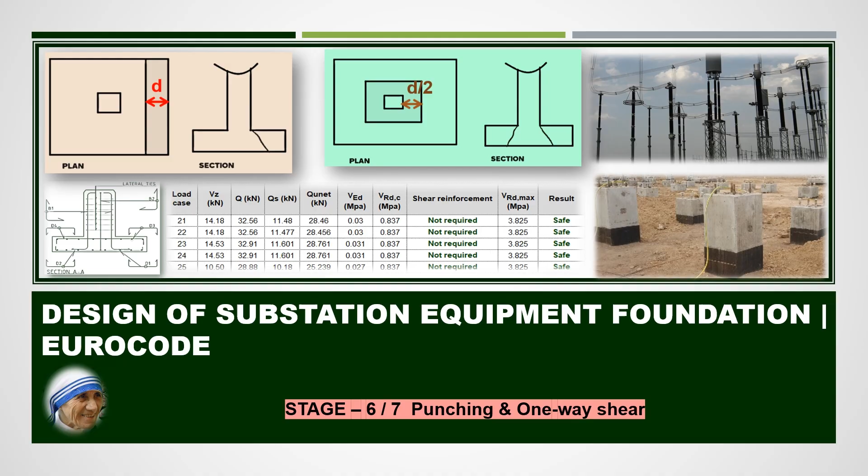These are the various design stages we have seen already. Number 1, in the first stage we have checked the overview of calculation. Second is foundation and soil parameter loads and load combinations. Followed by that, stability check, foundation bolt design of bottom slab, and now we are in punching and one-way shear.

After this we are going to close this series with design of pedestal in upcoming videos.

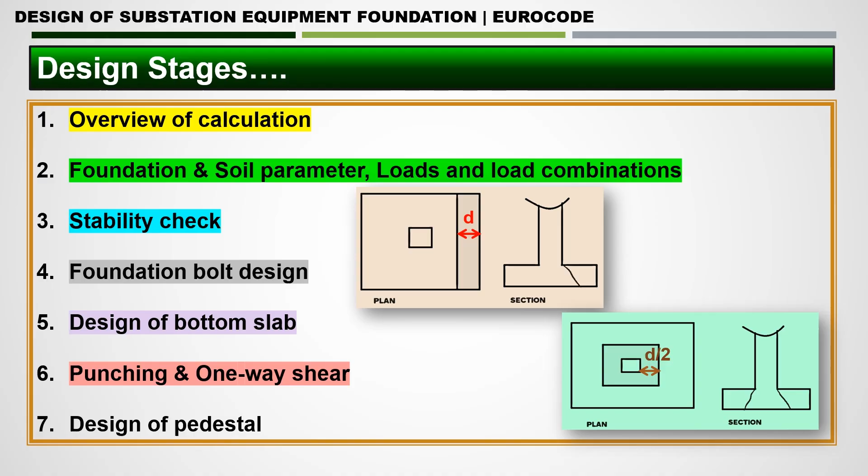Let me look into that Excel calculation. So in the screen you can see that to check for punching shear on bottom pad, first of all we need to calculate the effective width in X and Y directions, that is B plus T effective and L plus T effective respectively.

For B plus T effective we already know that B is 700 mm or 0.7 meter, and T effective is 250 mm or 0.25 meter. So you can see that both small L and small b are 0.7 meter, and T effective, which we calculated in the design of bottom slab, is 0.25 meter. Adding these two, 0.95 meter will come. So this is the value for B plus T effective and L plus T effective.

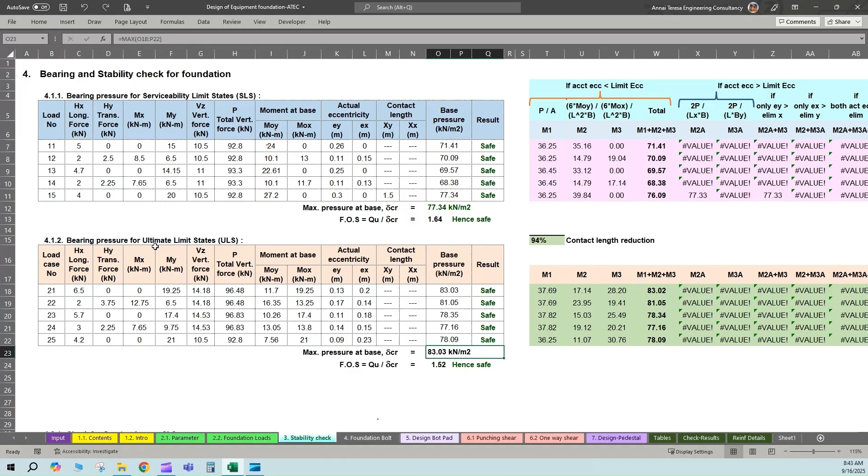Next we need to calculate these table values. So first we will take case number 21. So Vz we already calculated in our previous stability check. So 14.18 kilonewton is our Vz.

So the next value in this column in the table is Q. We need to find out Q, which is the maximum compression force on the pedestal. So per pedestal, as we are having these isolated foundations, the N value will be 1, and Vz we already calculated, it is 14.18, and small b and L is 0.7 meter which we have defined in parameter.

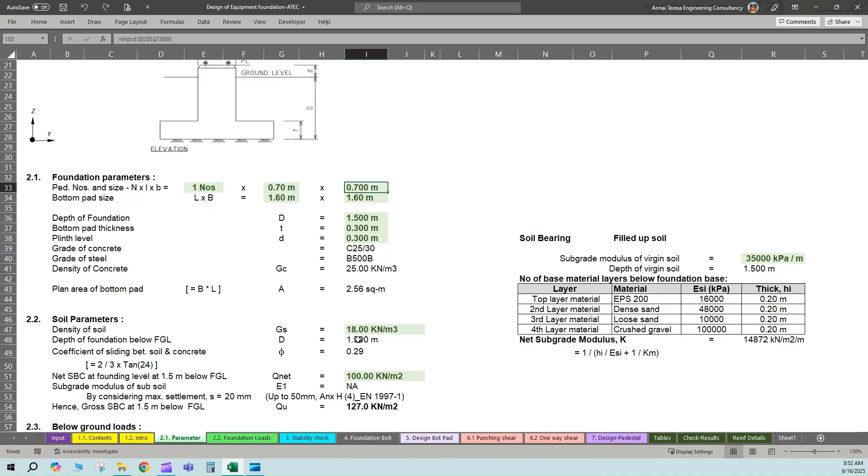The capital D is the foundation depth from the ground level. The small t is the thickness of the bottom slab. Small d is the pedestal height above ground. The GC is the concrete weight density. So we have already defined capital D as 1.5 meter, small t as 0.3 meter, and small d, that is plinth level, the pedestal above ground level, as 0.3, and GC, that is concrete density, we have considered as 25 kilonewton per meter cube.

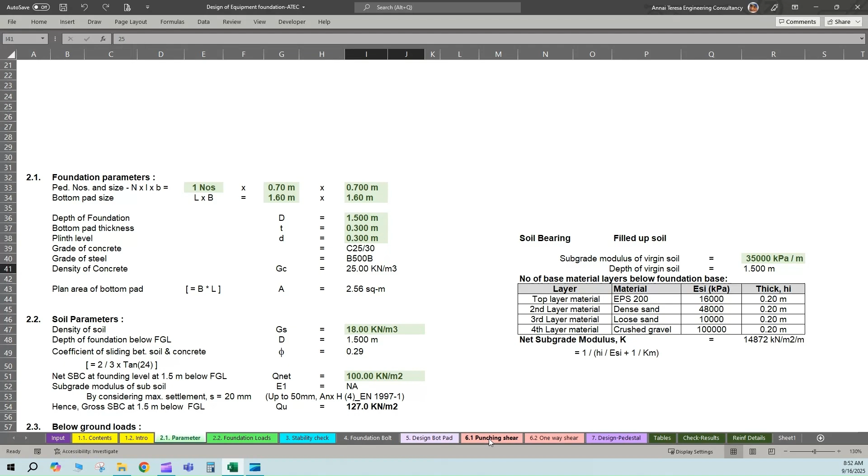So applying all this we can find out the Q value, which is 32.56.

Next column is QS. The QS is the soil resistance. So Q into N, that is number of pedestal, is 1, and B effective. So this value we need to multiply, this 0.95 is B effective and L effective respectively, divided by the capital B and L, which is the bottom pad slab size, assumed as 1.6 by 1.6 meter. By this way we can find out the QS value, that is maximum soil resistance, also in kilonewton.

Q net is a factor we need to find out, so the QU net is the net factored punching shear, meaning we need to subtract this QS from Q and multiply with the factor of safety. So the factor of safety we already considered as per Table 2.1N, EN 1992-1, Part 1, Section 1. So this is 1.5. So this 1.5 for concrete we have considered.

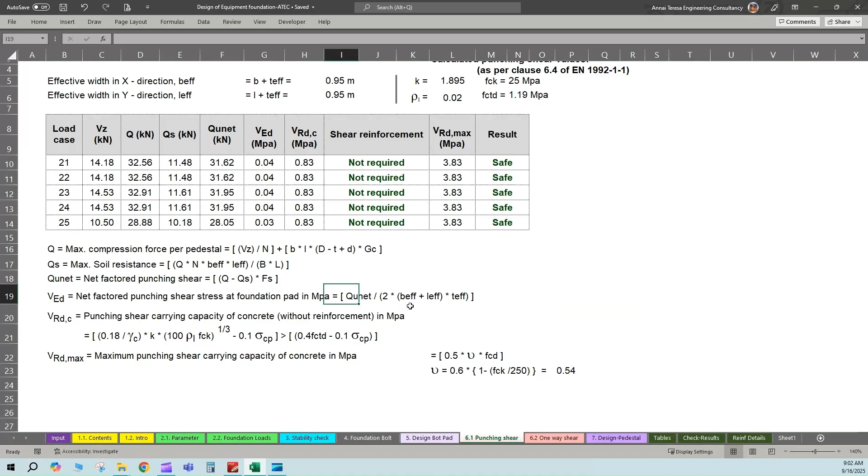So we note that BEF is 0.95 and LEF also 0.95 and TEF is 0.25 meter, and QU net we already calculated as 31.62. So applying that we are getting 0.04 as VED, that is net factored punching shear stress at the foundation pad. The value is in megapascal, that is Newton per millimeter square.

Similarly, we need to find out the punching shear carrying capacity of concrete without reinforcement. This is as per clause 6.4 of EN 1992.

We need to find out the punching shear capacity of concrete without shear reinforcement. For this we refer the equation: 0.18 divided by gamma C into K into 100 rho I, which is a percentage of steel reinforcement, FCK into 1 divided by power 1 by 3, plus 0.15 sigma Cp, and it should be greater than 0.035 K power 3 by 2 FCK power 1 by 2 plus 0.15 sigma Cp. These equations we can find from clause 6.2.2 of EN 1992.

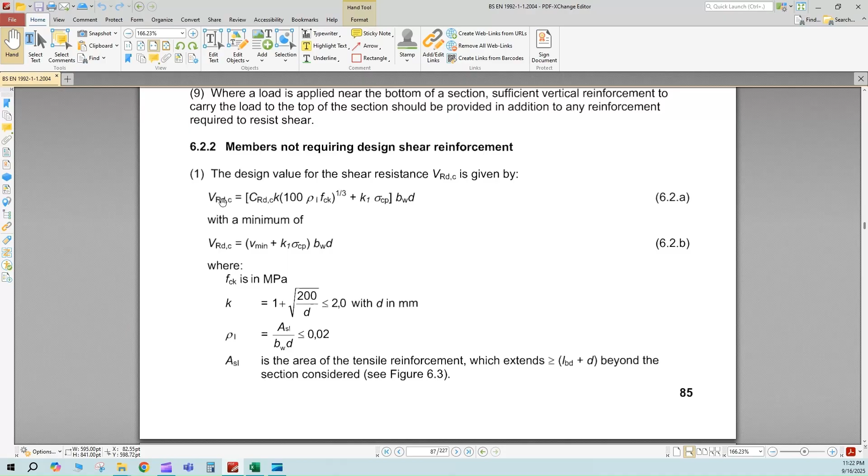You can see on the screen, this is the equation which we have followed here. The DC value is directly given as 0.18 divided by gamma C. So that's what we have considered here, C or DC as 0.18 divided by gamma C. So gamma C we already know is 1.5, as we assumed in our load cases. In the introduction part itself we have assumed it is 1.5 as per table 2.1 N.

So this rho I we need to calculate, that is area of steel reinforcement divided by the area required. There is a special formula: ASL is steel reinforcement area divided by width and depth of the pedestal, so that we will be getting that. However it should be less than 0.02, but in our case it will be more than that, so we can have it 0.02 as rho L, and FCK is 25 megapascal.

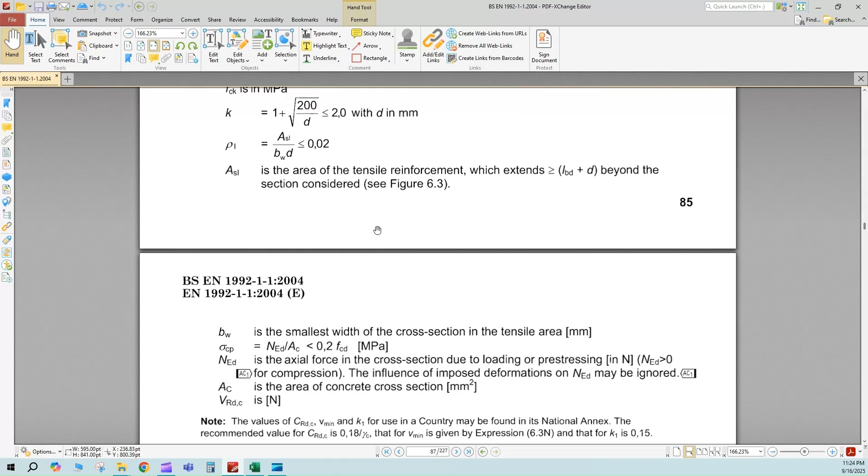So this power 1 by 3, and here 0.15, here K1 it is mentioned as K1 sigma Cp. So this K1 value is also given here as 0.15. So that is what we have considered, 0.15.

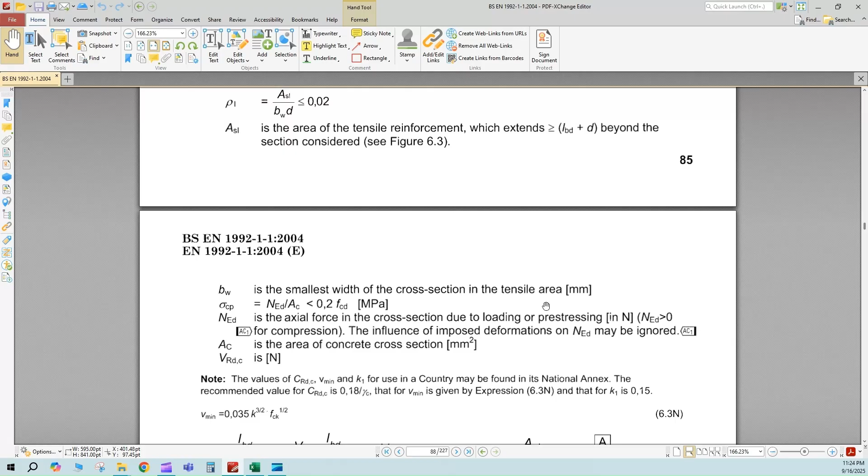So this sigma CP is not applicable for the normal method of concreting for our equipment foundations. Generally that will be cast at site or precast, so this pre-stressing is not applicable for this case. So totally this sigma CP into K1 will be 0, so this we can ignore, and similarly for this minimum value also we can ignore.

Only that V minimum we need to consider, and here this CRDC K 100 rho L and FCK power 1/3 to be considered. Also we are going to find only the stress value in our calculations, so this BW into D also we can ignore. So our unit will be in megapascal, this punching shear carrying capacity.

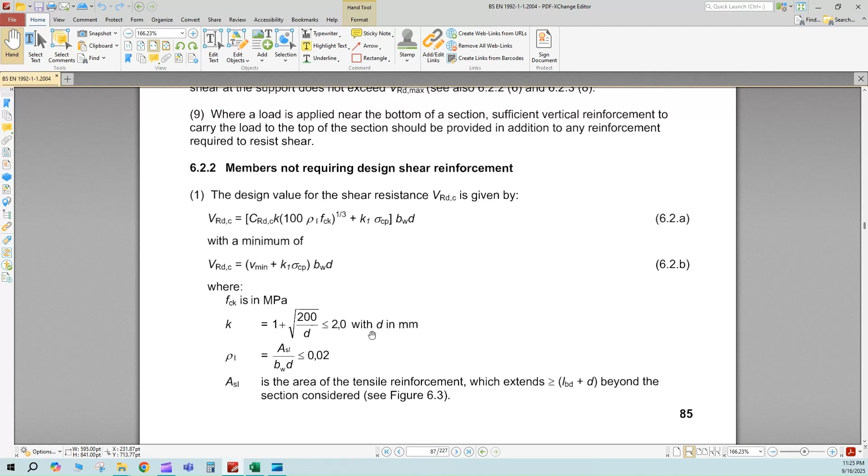So that is the way we need to calculate all this value. We already have all the values here. So this K is also defined here as 1 plus square root of 200 divided by D, which should be less than or equal to 2. So the D is the dimensions or size of the pedestal.

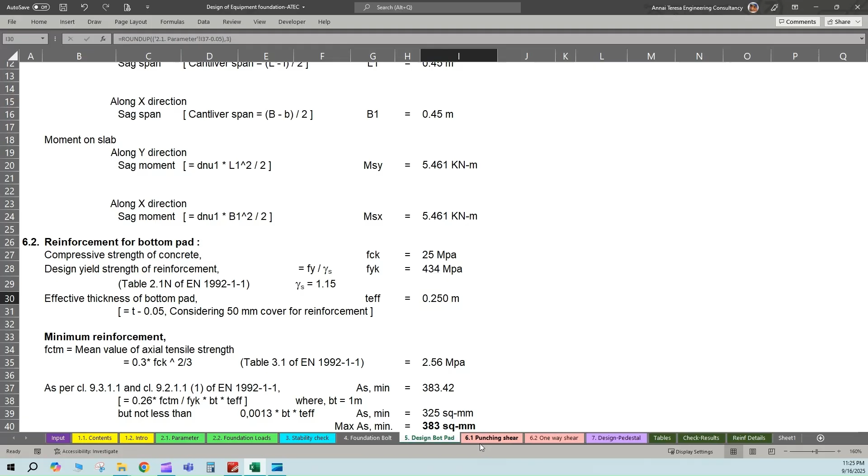Sorry, it is the thickness of the raft, 250. So applying all this, we are getting 1.895, which is less than 2, so we are considering this 1.895 as K. So here that equation is like this. So for all the cases, this value remains same, 0.45.

As a result of this, we can identify that VRDC, that is punching shear carrying capacity of concrete without reinforcement, is having more shear stress bearing capacity compared to the actual net factored punching shear stress at foundation pad. Hence shear reinforcement is not required in this case, or else we need to design the shear reinforcement accordingly if the VED exceeds the VRDC.

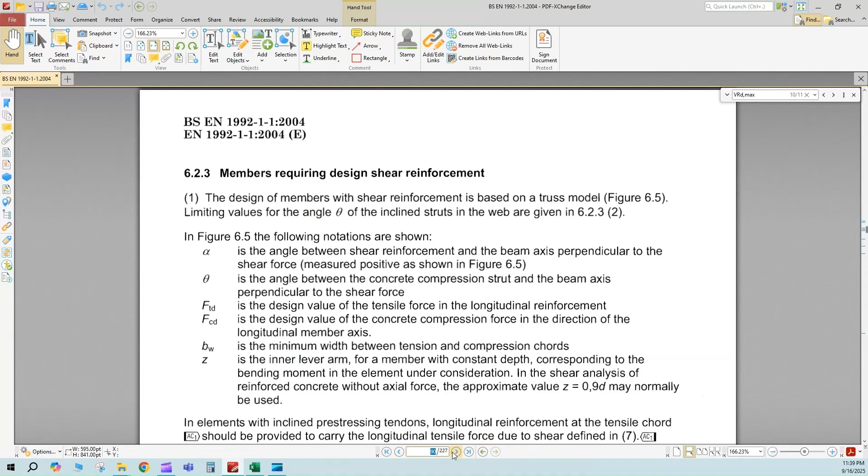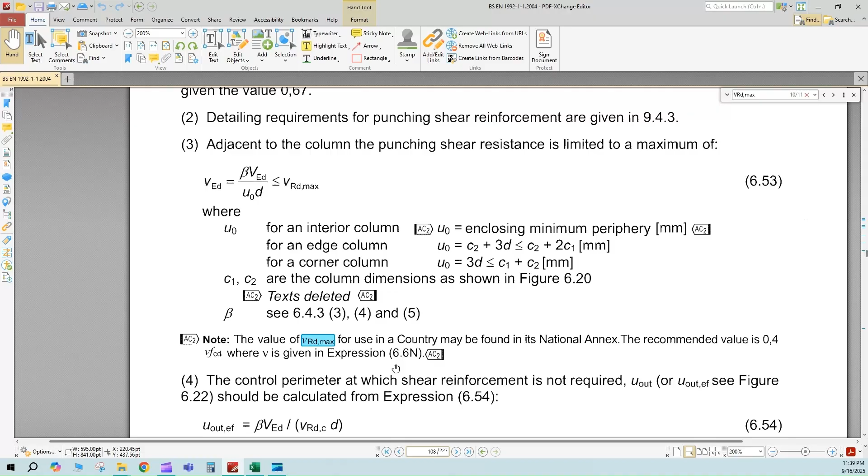Now coming to VRDC maximum, in no case should VED exceed VRD max. This is the maximum shear carrying capacity of the concrete. How this can be calculated is given by an equation mentioned in EN 1992, for which we need to go to page 108. You can see here the value of VRD max - anyway the national annexure should be referred for country code requirements. The recommended value is 0.4 into V FCD, where V is given in expression 6.6N. So here the 0.4 VFCD we have considered.

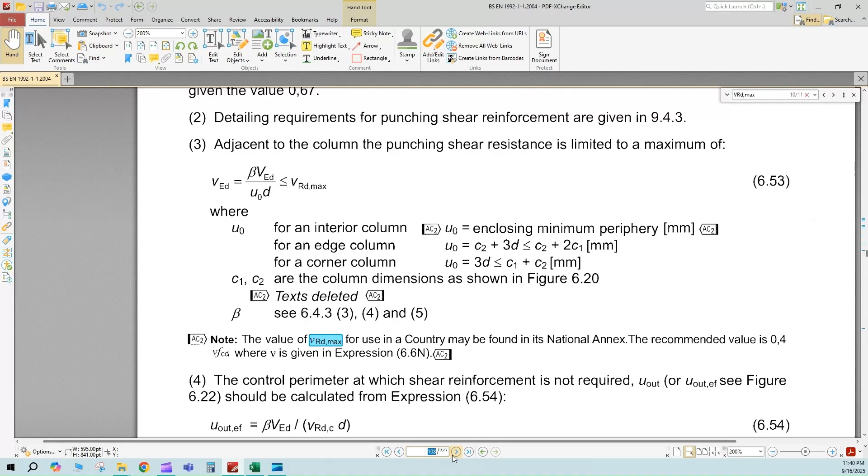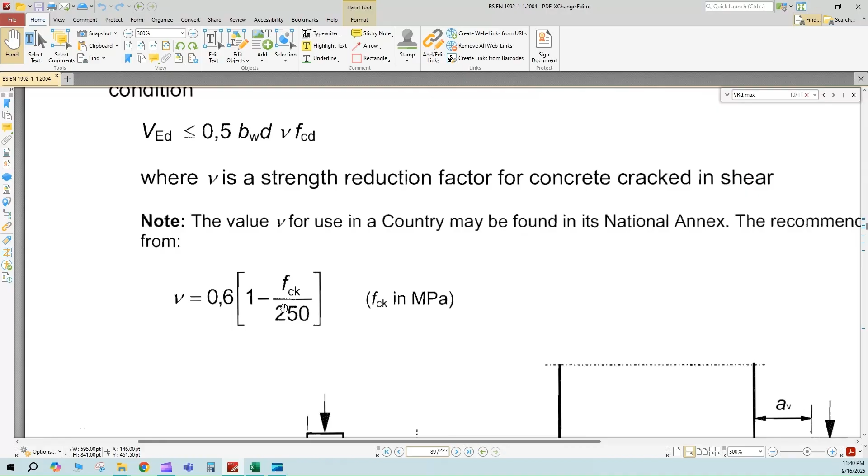So then for V value we need to refer 6.6n, for that page number 89 to be referred. Here you can see that V equal to 0.6 into 1 minus FCK divided by 250, so that is what applied here, which is 0.54.

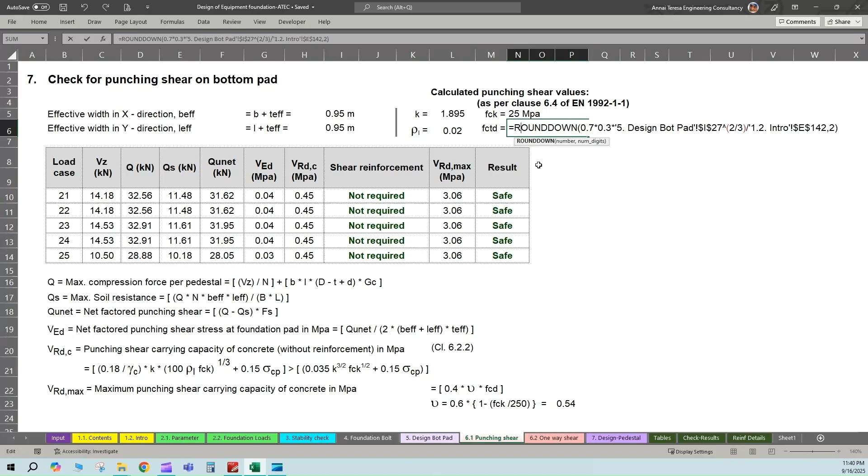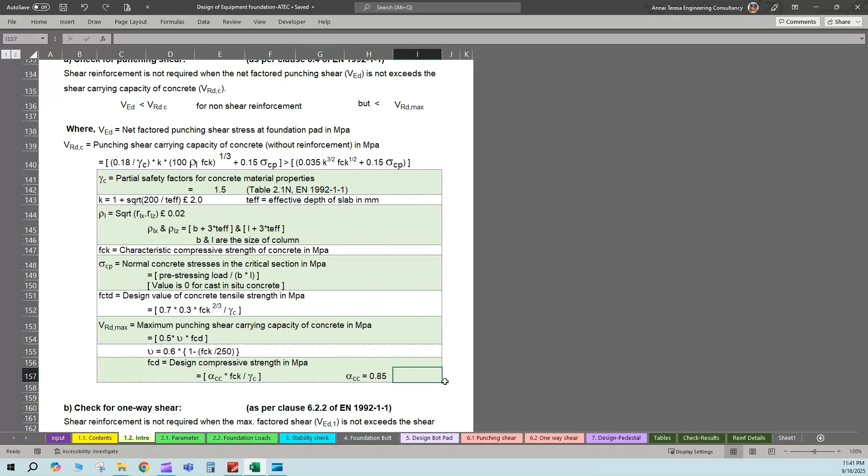We got this V, and FCD we already calculated from our previous equation. So FCD is nothing but 0.85 into FCK divided by gamma C, which we have seen already in our introduction part. So this one, alpha CC into FCK gamma C, and alpha CC is 0.85, whereas gamma C is 1.5, which we already know, and FCK is 25.

Applying this, we are getting VRD max as 3.06. This actual shear capacity VED is already less than this VRD max, so this is safe in punching shear.

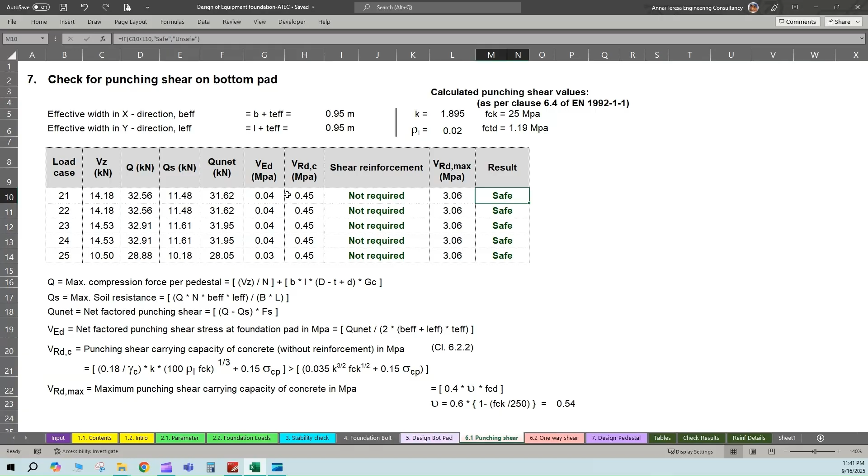Next we need to do check for one-way shear on bottom pad. For that we need to do for both directions along x and y. We know that partial factors for material for ultimate limit state is 1.5, which we have taken from table 2.1N EN 1992 part 1 section 1.

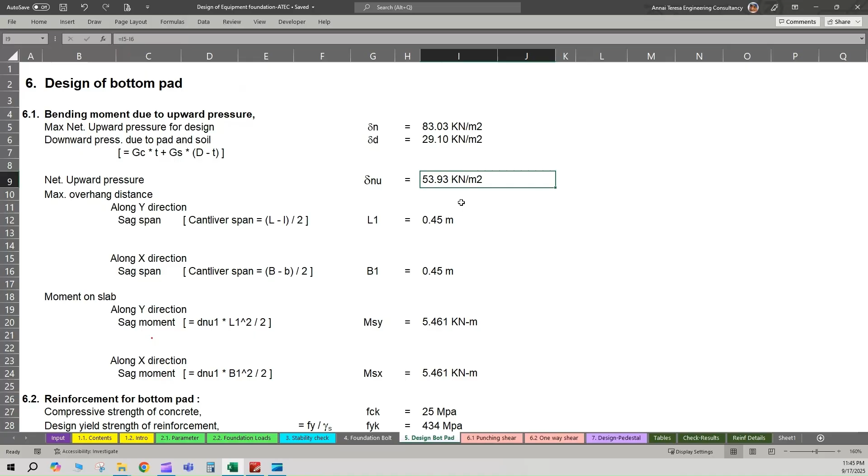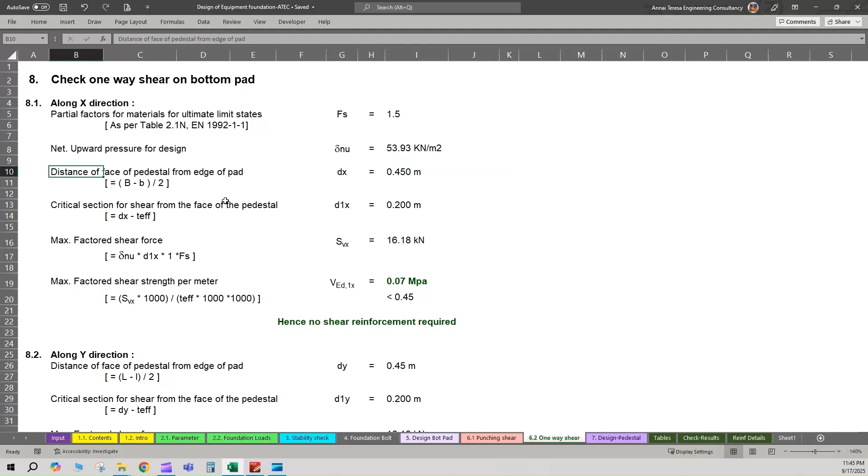Net upward pressure of design we have considered based upon the design of bottom pad calculations, which we have already done in our previous part. Distance of face of pedestal from the edge of the pad we need to find out, that is the distance from - so this distance we need to find out.

For that we need to apply this capital B minus small b divided by 2, similar like for other direction, capital L minus small l divided by 2. By applying this, as it is a square footing and square pedestal, both directions we are getting 0.45 meter, and critical section for shear from the face of the pedestal, this value is dx and dy respectively to the direction of x and y.

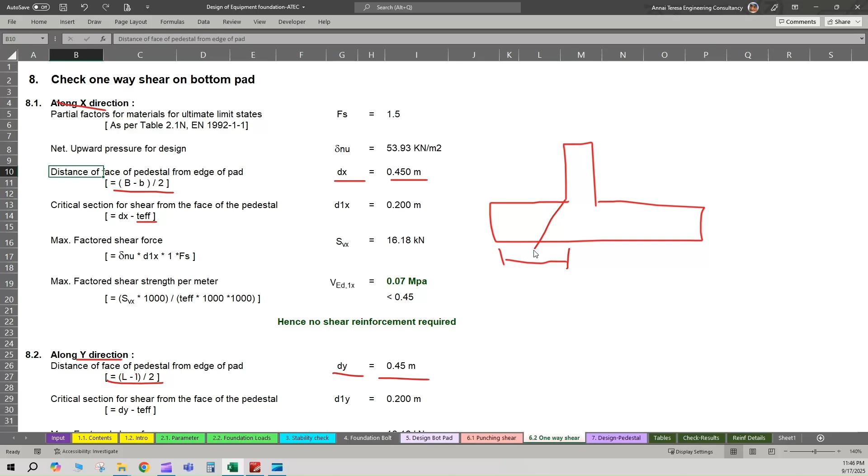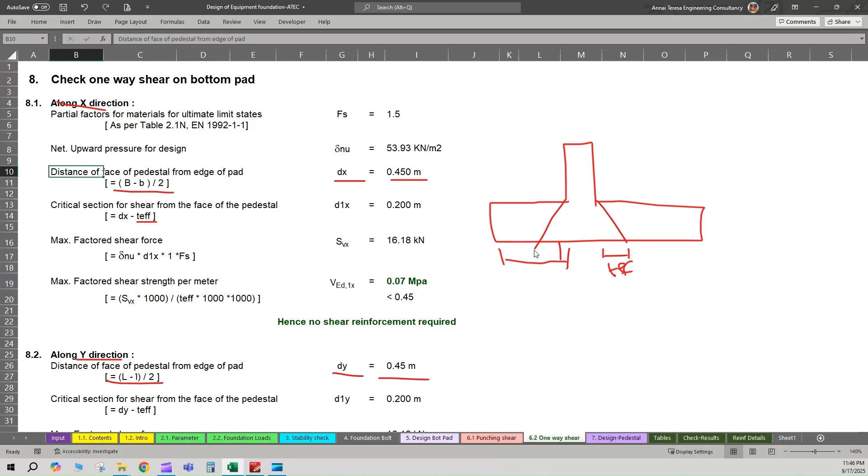In that we need to deduct T effective, that means this distance equal to T effective. So this distance we need to deduct so that we will get this distance, which is the effective shear distance d1x. We know that T effective is 0.25 meter, so deducting from 0.45 meter we will get 0.2 meter. This is the same value for y direction also.

Next we need to find out the maximum factored shear forces, which is equal to delta nu, 53.93 kilonewton per meter square multiplied with d1x, the critical section for shear from the face of the pedestal, which is 0.2 meter for both directions, and 1 meter we are considering along the other direction strip, and fs is the partial safety factor 1.5.

Applying all these values in this equation, we are getting 16.18 kilonewton, and maximum factored shear strength per meter equal to

SVX into 1 meter width we are multiplying as 1000, and T effective, which should be divided by T effective. Here this multiplication of 1000 means we are converting kilonewton into newton, and T effective we already consider as 0.25 meter, multiplying with 1000 that will come to 250 mm, and again this is breadth in 1 meter strip we are going to consider for this factored shear strength.

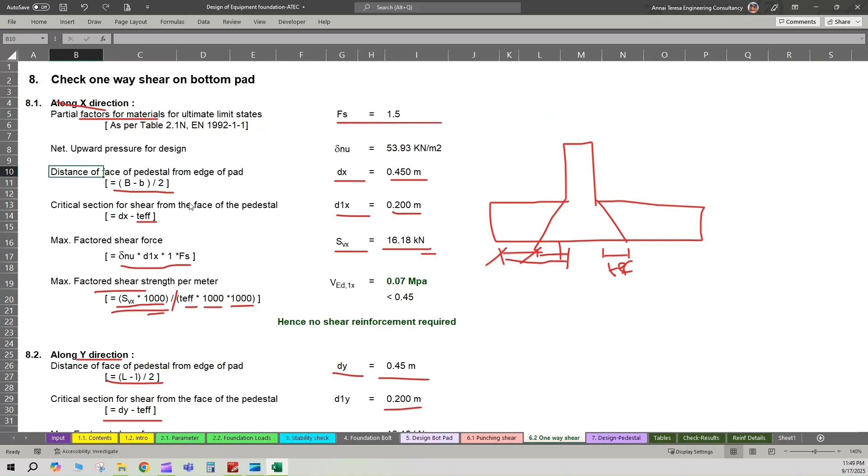Applying these values, SVX is 16.18 multiplied by 1000 for newton, and T effective is 0.25 multiplied by 1000 will have 250 mm. Applying all this value, we are getting 0.07 megapascal, which is less than the calculated shear reinforcement here in punching shear equation, which is 0.45. Hence this one-way shear, this base slab is safe in one-way shear.

Similar like for other case also, the value will remain same because both directions we are having equal size of the pedestal and size of the base slab. So this is also 0.07 megapascal, which is less than 0.45. Hence no shear reinforcement is required.

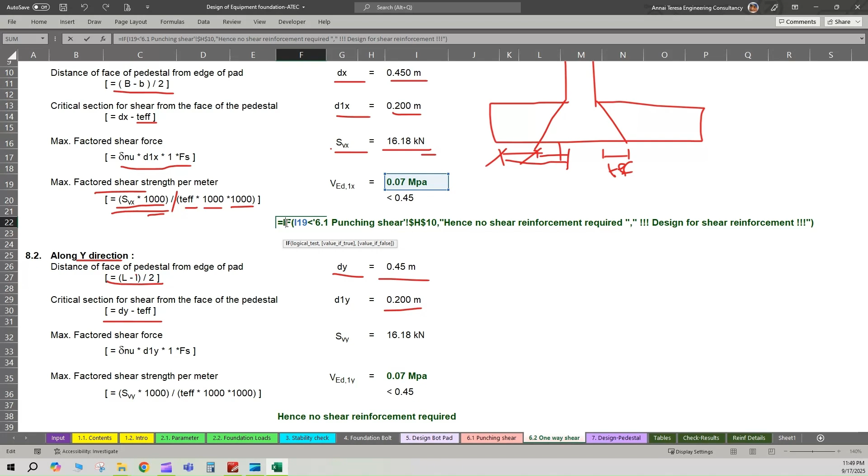So with this, one way and punching shear get completed.